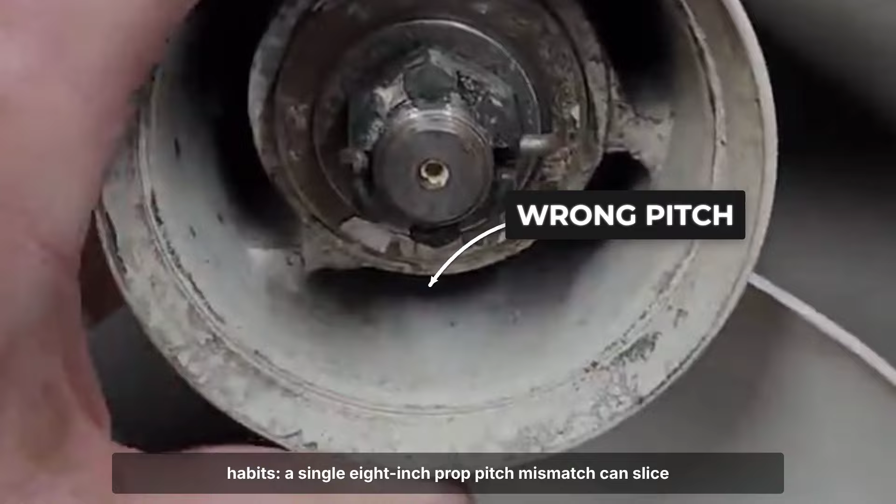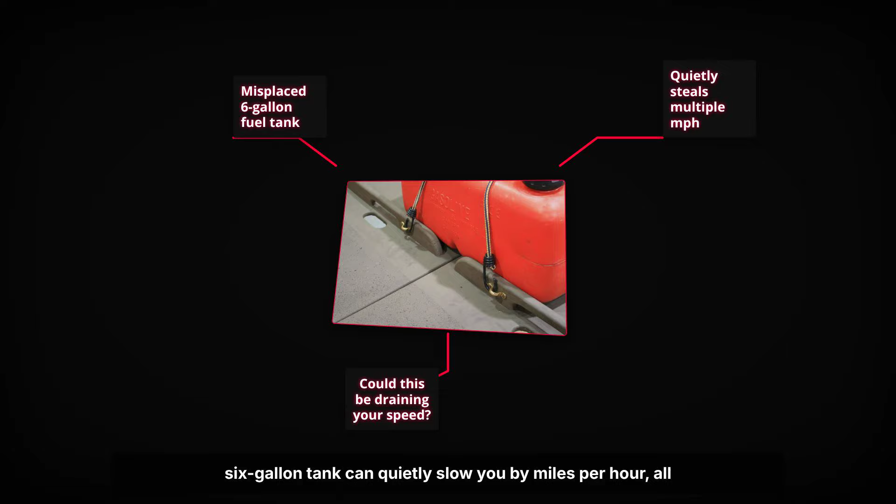What if every ounce of power and speed your outboard promised was leaking away, killed not by age, but by silent mistakes you make every time you launch? The shocking things that are killing your outboard's performance and speed aren't rare disasters. They're routine habits. A single 8-inch prop pitch mismatch can slice away power you'll never get back. And just a misplaced 6-gallon tank can quietly slow you by miles per hour, all before chemistry and hidden flaws even get the chance to strike.

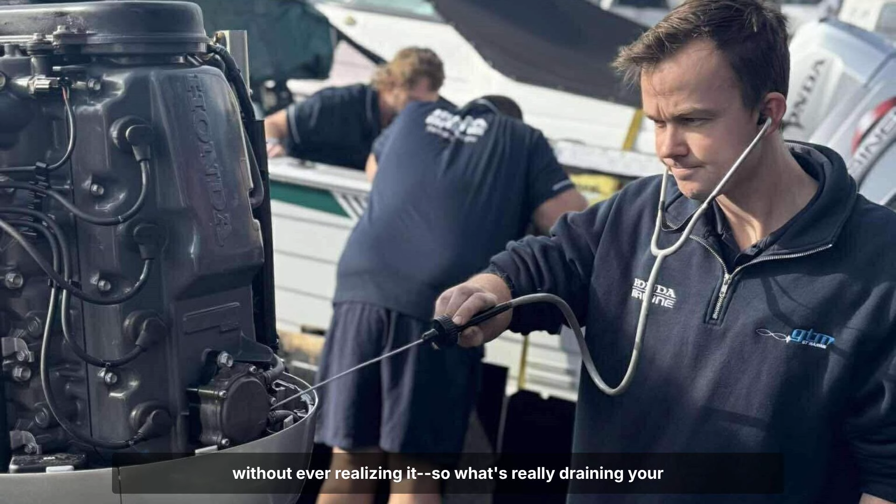Thousands of boaters lose years of performance this way without ever realizing it. So what's really draining your engine's potential? And how do you stop it before it's too late? Number 1 is trim and prop setup. If your trim angle is too low, you're forcing the bow down and dragging more hull through the water. That's pure wasted energy. Your engine works harder, but you lose speed and fuel efficiency.

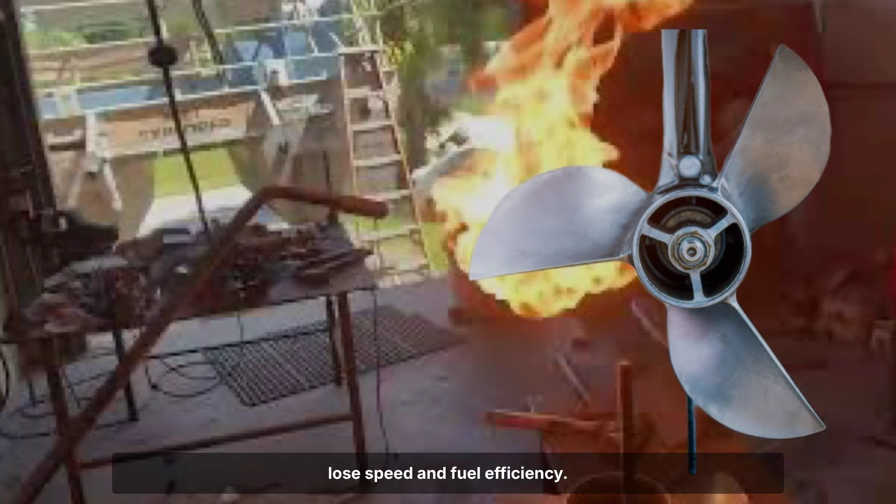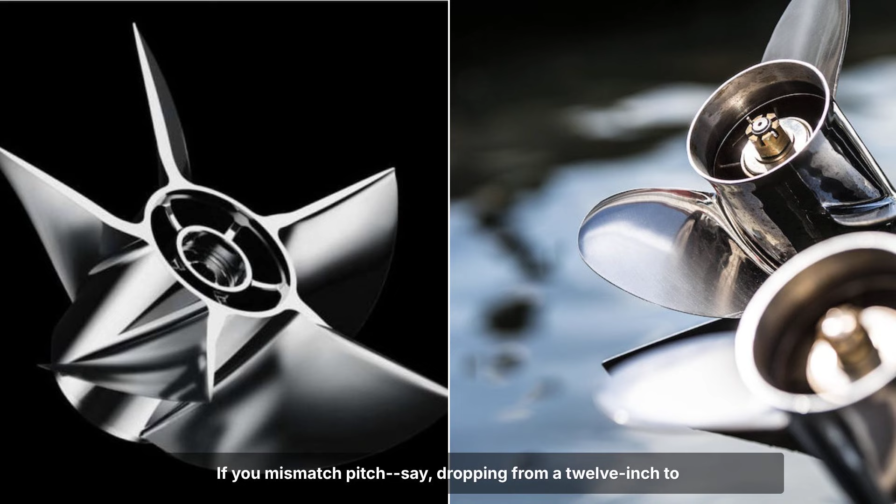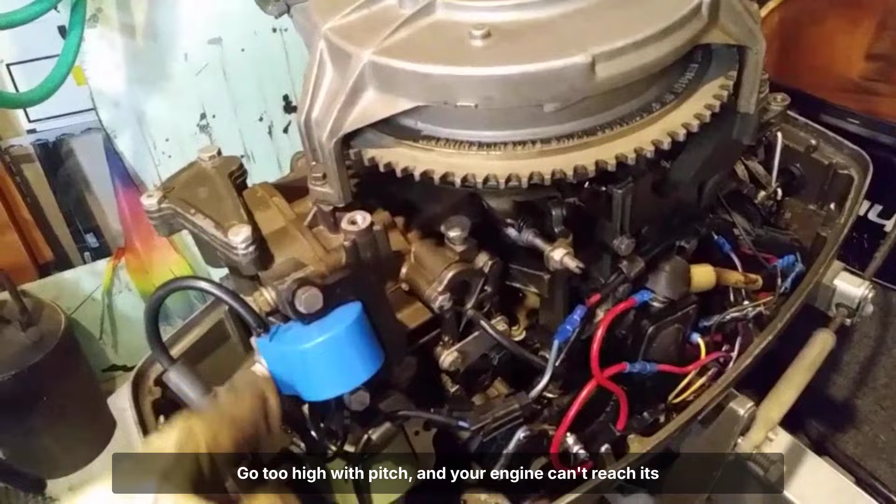Now, look at prop pitch. This prop has an 8-inch pitch, so in perfect conditions, every revolution moves you forward 8 inches. If you mismatch pitch, say dropping from a 12-inch to an 8-inch, you get more revs, but the boat moves less each turn, and your top speed drops. Go too high with pitch, and your engine can't reach its ideal RPM, choking off power and straining components.

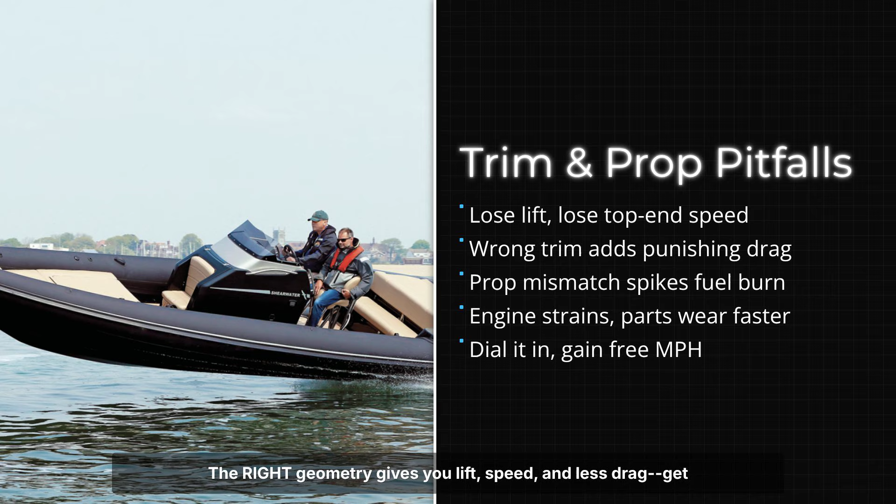Most boats lose 2 to 4 miles per hour from a bad trim or pitch combo, even with a healthy engine. The right geometry gives you lift, speed, and less drag. Get it wrong, and you're throwing away performance every time you throttle up.

Number 2 is weight and load mistakes. Every pound you add or put in the wrong spot quietly drags down your speed. Take a 6-gallon gas tank. That's 40 to 50 pounds. If you stash it up front, you're forcing the bow down, making the hull plow through more water. The boat rides lower, and your engine has to work overtime just to keep pace.

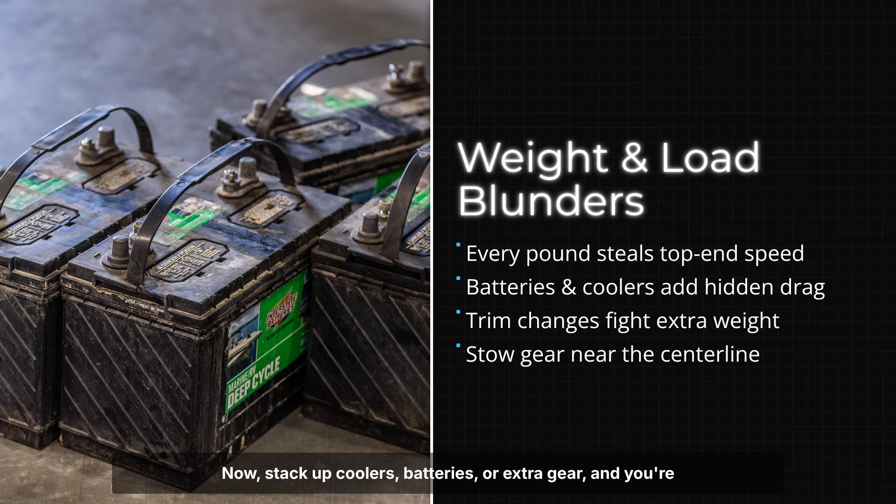Now stack up coolers, batteries, or extra gear, and you're adding real resistance. It's not just about total weight, it's where you put it. Hull attitude changes with every shift, and that shows up on your GPS. Most setups lose a mile or 2 per hour for every 100 pounds of extra load. Overload it, and you're not just losing speed, you're burning more fuel and risking safety. Always pack smart, and don't let hidden weight rob your outboard's edge.

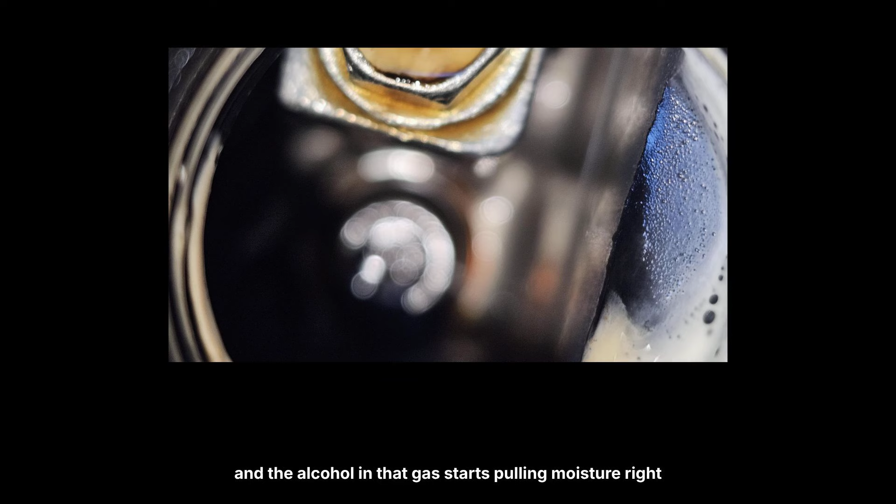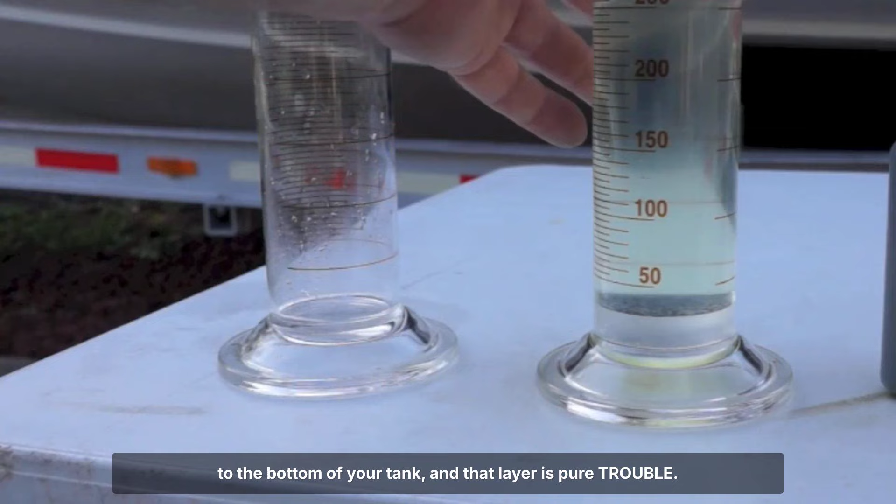Number 3 is ethanol fuel. Ethanol is like a magnet for water. Leave your boat sitting, and the alcohol in that gas starts pulling moisture right out of the air. Over time, you get phase separation. Water and alcohol drop to the bottom of your tank, and that layer is pure trouble. If your pickup sucks up that mix, your engine's running on something closer to swamp water than gasoline. Even a few ounces can kill power instantly.

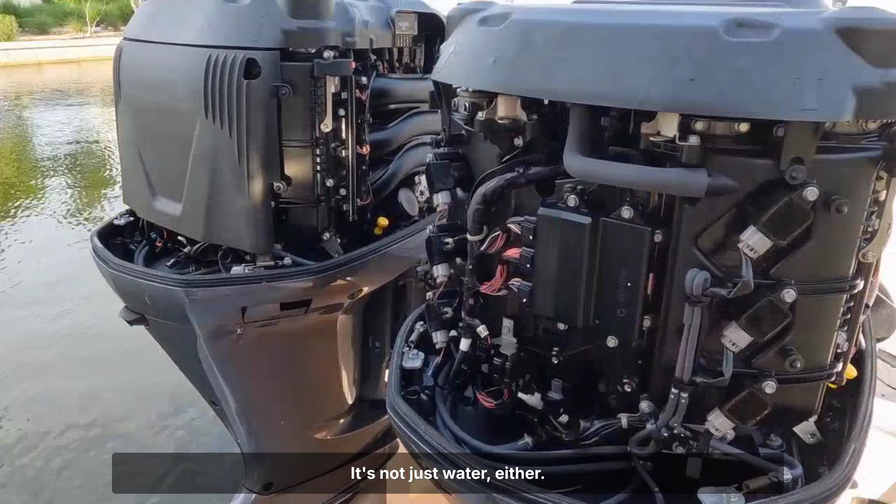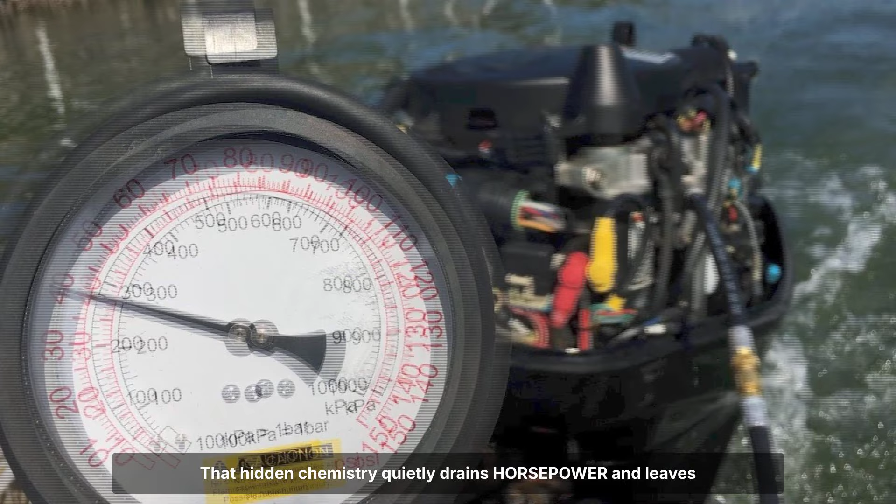It's not just water either. Ethanol fuels feed bacteria that turn into acid, corroding tanks and lines from the inside out. You can see the impact in real-world disasters. At the Sarasota offshore race, several teams lost speed and had to pull out after bad ethanol fuel turned their engines into anchors. When you run ethanol-blended gas, you're gambling with every tank. That hidden chemistry quietly drains horsepower and leaves you stranded when you least expect it.

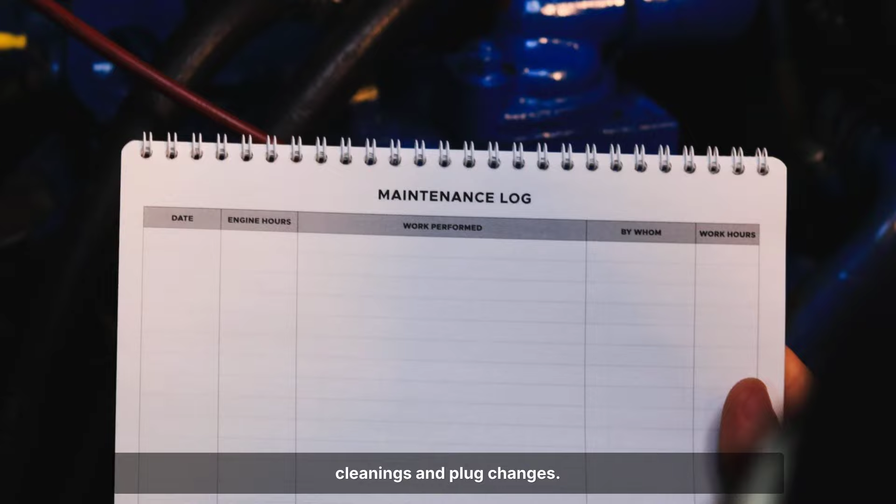Number 4 is skipped maintenance. Letting service slide is like handing your horsepower away, one piece at a time. Red Dawson, a marine mechanic with a logbook going back to 1995, keeps every record of injector cleanings and plug changes. He's seen engines lose 10–15% of their rated power. No drama, just slow decline.

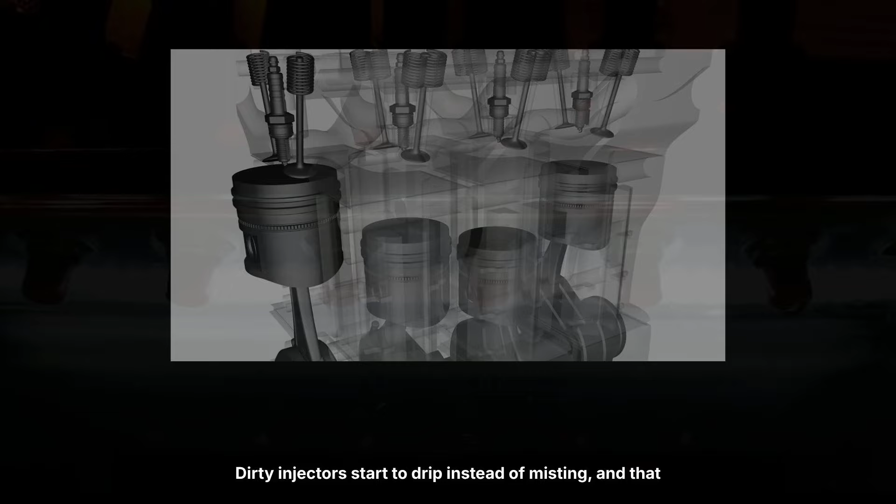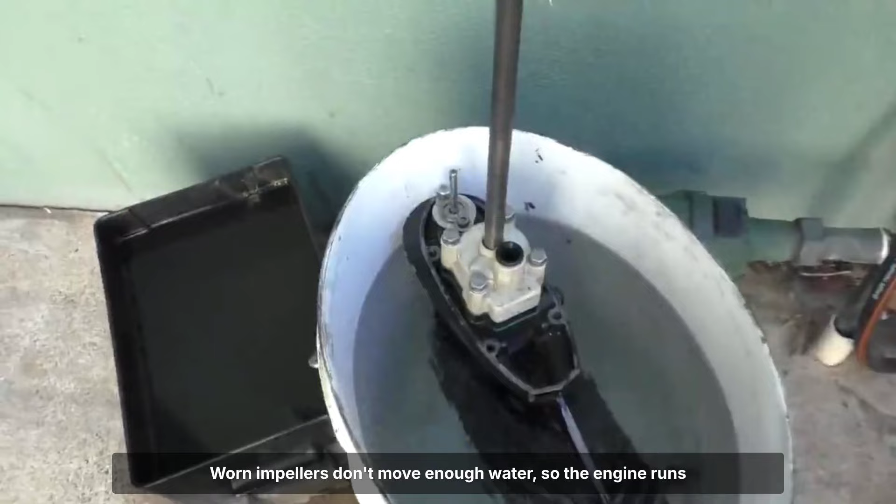Dirty injectors start to drip instead of misting, and that means incomplete combustion with every cycle. Old spark plugs get fouled, misfire under load, and rob you of acceleration. Worn impellers don't move enough water, so the engine runs hotter and hotter until it starts pulling timing to protect itself. Red's records show that an outboard missing 2 years of routine service can drop a full 1,000 RPM at wide open throttle.

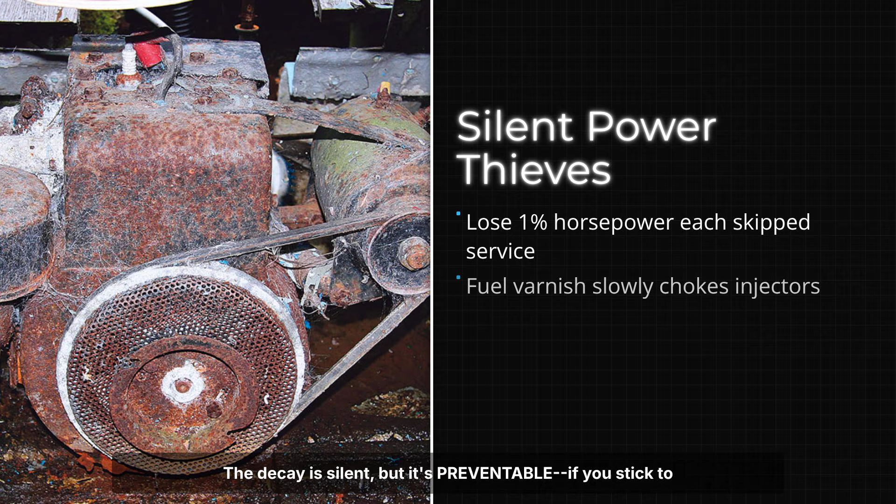Every missed oil change, every skipped filter, it all adds up. The decay is silent, but it's preventable if you stick to the schedule.

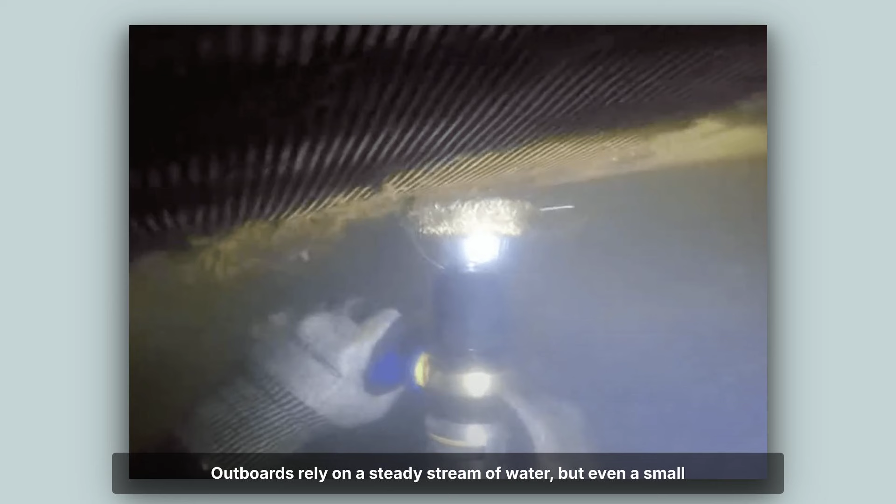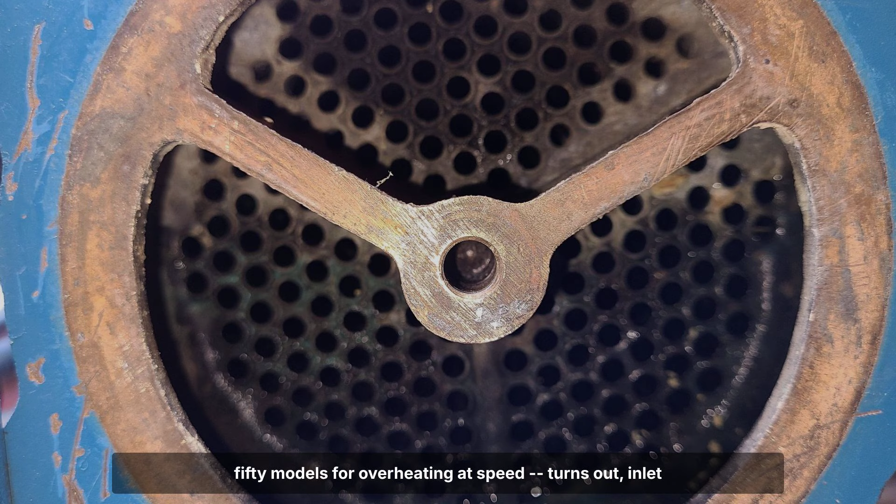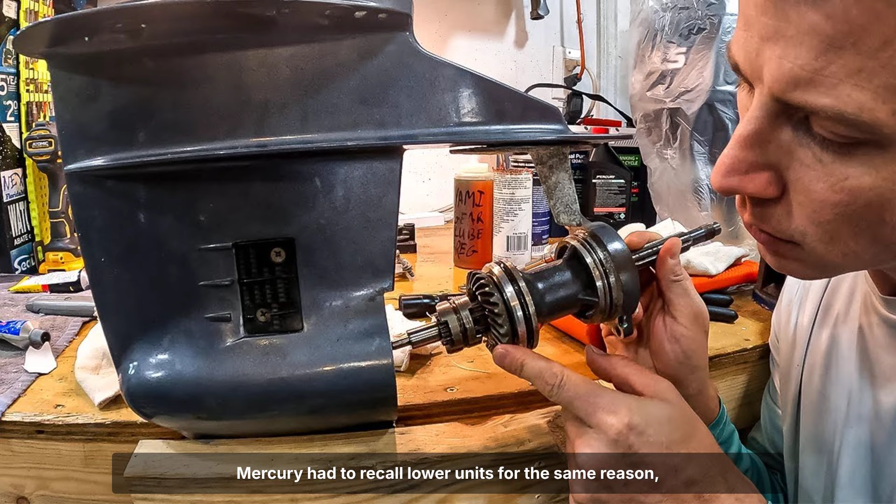Number 5 is coolant system blockages. Outboards rely on a steady stream of water, but even a small bit of silt or debris can choke off the flow. Yamaha's 2011 bulletin called out F115 and F150 models for overheating at speed. Turns out, inlet screens with holes just 1 millimeter wide were trapping junk and starving the engine of cooling water. Mercury had to recall lower units for the same reason, doubling mesh size to stop clog complaints.

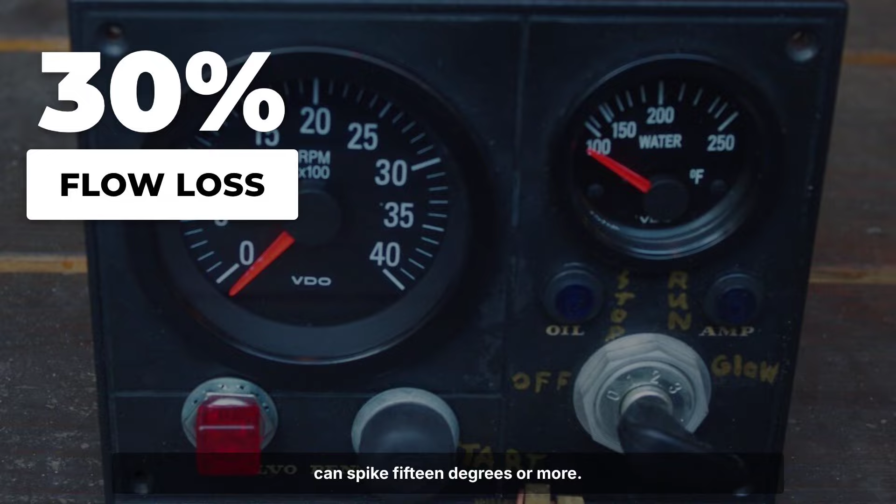Drop your flow rate by 30% and head temperatures can spike 15 degrees or more. That's not just hot, it's enough to trip alarms and force your engine into limp mode.

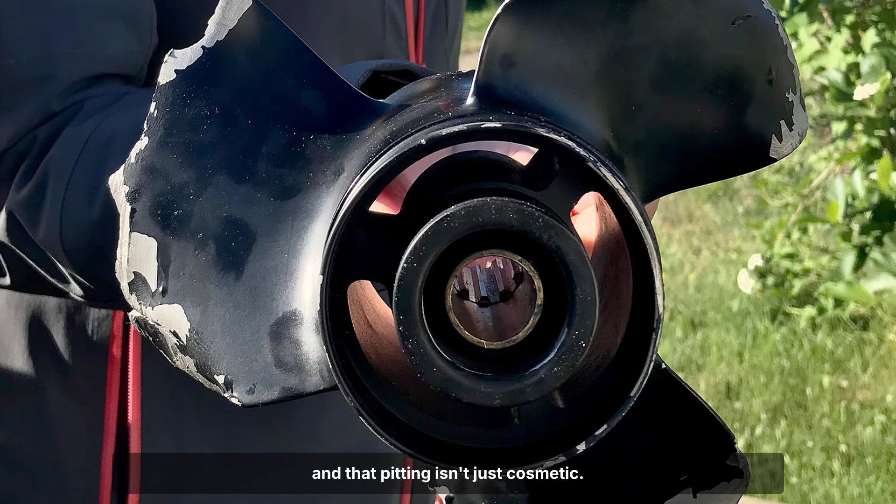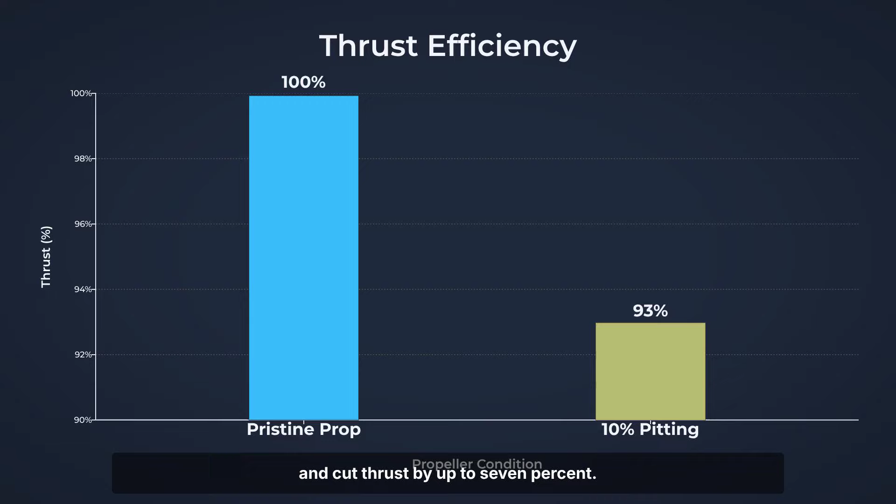Number 6 is propeller cavitation. When bubbles collapse against the blade, they pit the metal. And that pitting isn't just cosmetic. Lab tests show that moderate pitting, covering just 10% of the blade, can drop your top speed by 2 knots and cut thrust by up to 7%. Severe erosion means higher fuel burn, more vibration, and a prop that's working against you every mile.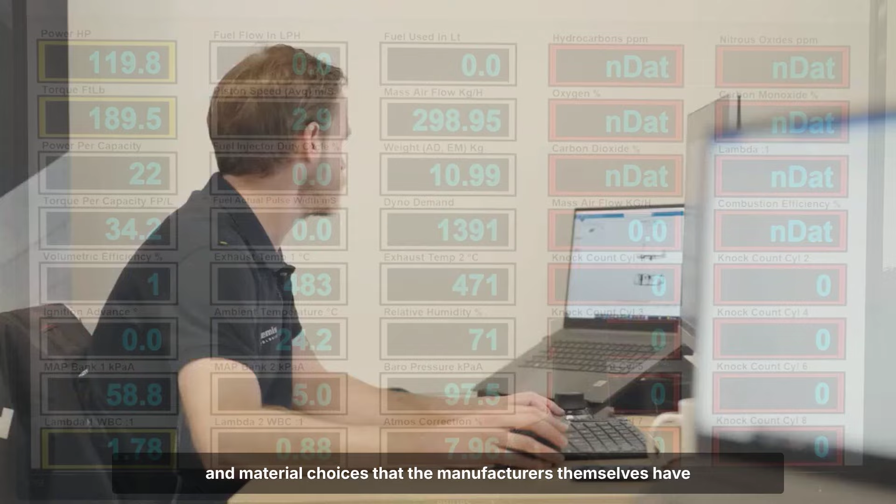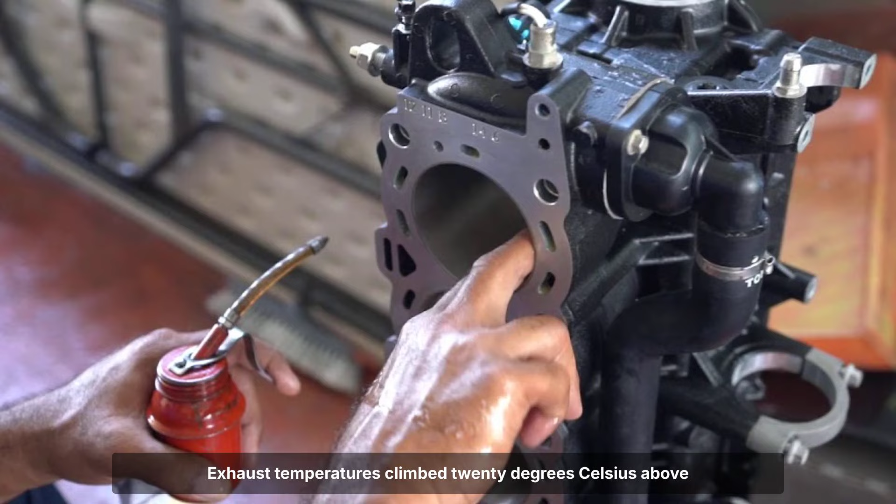These aren't just owner mistakes. These are design flaws and material choices that the manufacturers themselves have had to fix, one bulletin at a time. A 300-hour government endurance test on E15 fuel didn't just show wear. It left a 200-horsepower outboard with a shattered rod bearing and a 300-horsepower supercharged engine with cracked valves before the trial could finish. Exhaust temperatures climbed 20 degrees Celsius above spec, stressing every part.

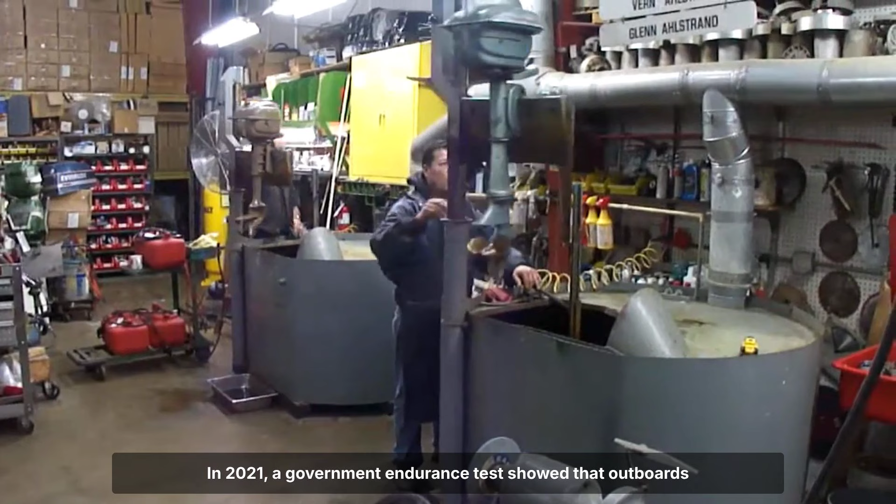Warranty disputes erupted as the renewable fuel standard kept risky blends at the pump, raising the odds of misfueling and silent engine failure for anyone on the water. In 2021, a government endurance test showed that outboards running E15 fuel suffered rod-bearing failure and a 20 degrees Celsius spike in exhaust temperature within just 300 hours.

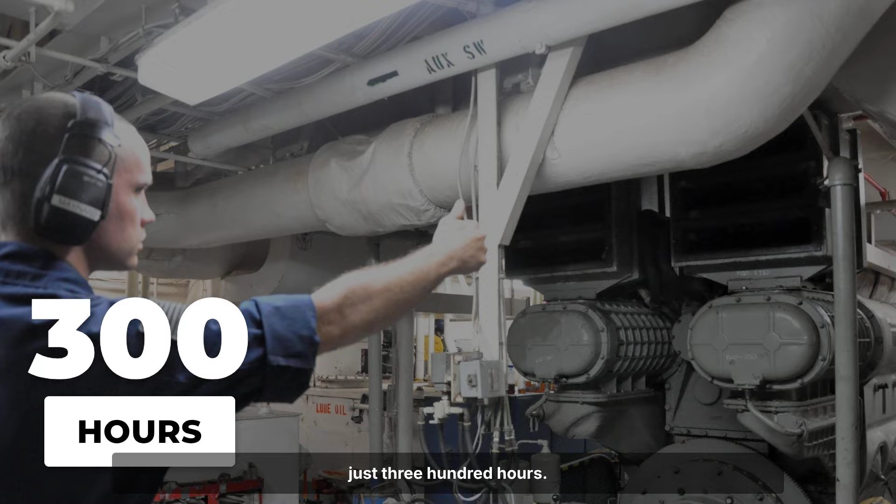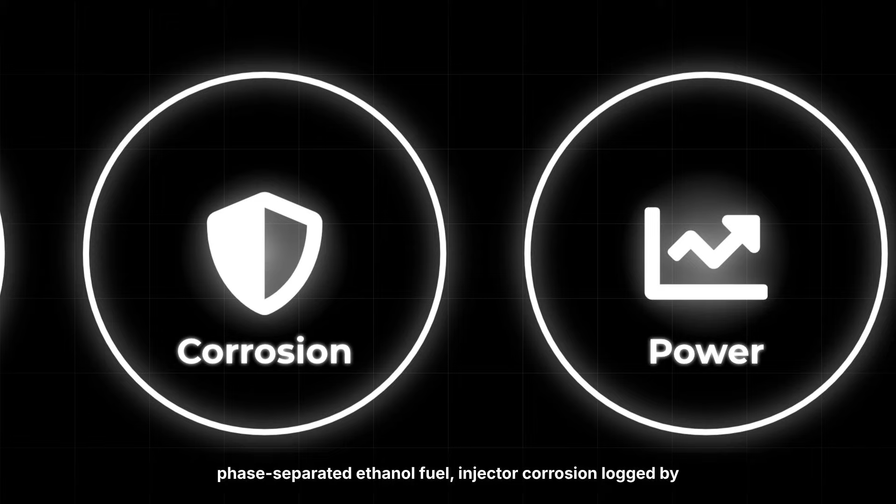Throughout this investigation, we exposed how simple trim and propeller mismatches can cost up to several miles per hour, while a misplaced 50-pound fuel tank or a 100-pound overload leads to measurable speed loss. Yet the most damaging threats are often invisible. Phase-separated ethanol fuel, injector corrosion logged by veteran mechanics like Red Dawson since 1995, and cooling blockages that triggered official recall bulletins from major manufacturers.

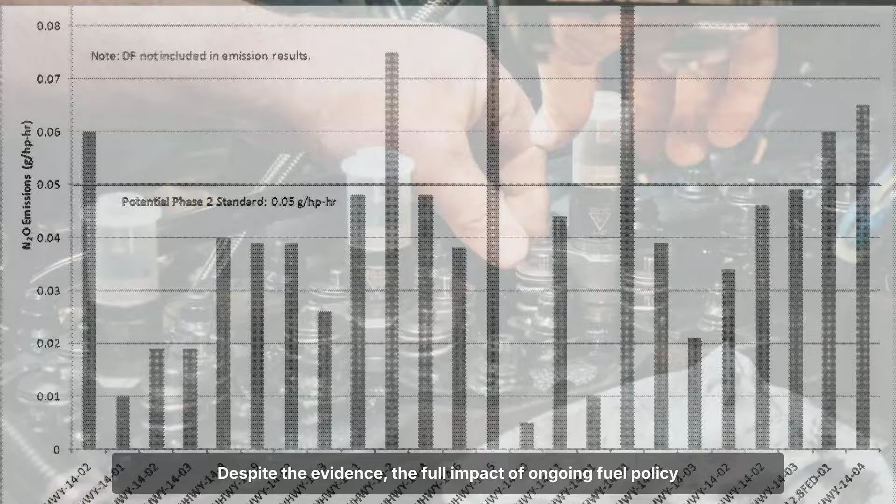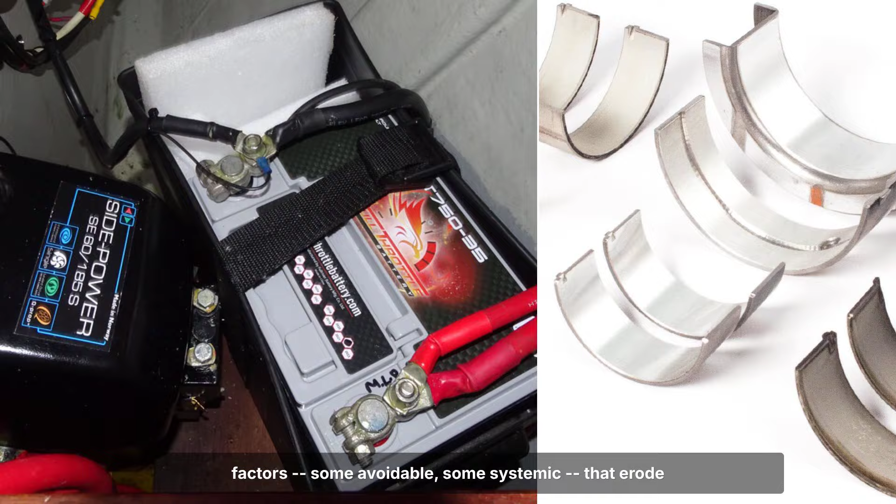Despite the evidence, the full impact of ongoing fuel policy changes and undisclosed design flaws remains unclear, with many warranty risks still unaddressed by regulators. What is certain, every outboard owner faces a combination of factors, some avoidable, some systemic, that erode performance and reliability. The documents and data are clear. Only informed vigilance can preserve the power and speed these engines were built to deliver.